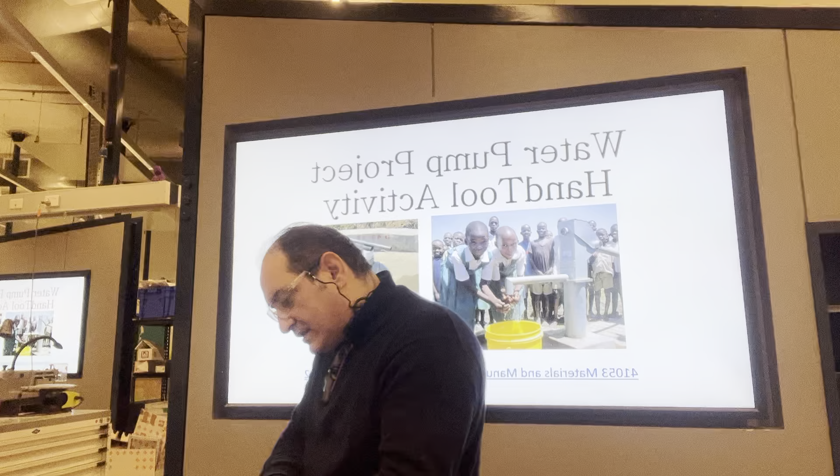Okay, so we're going to start with the other part of the activity. There's going to be the hand tool project. Actually, this is meant to be just the water pump project, a part of the activity we have in the previous subject, where the students work in groups. Now we can work in a group as well. They were designing their own pump, or they can follow the pump we have as a standard one.

The most important thing is that the students should learn how to take a simple stuff like this pipe and make it a pump. Now, what was the definition of the manufacturing processes in general? Set of operations. The main value for it is to make, well, I can say, make the unuseful thing a useful thing, or just add value to the material.

I can buy this pipe, let's say for $5 for 2.5 meters. No, actually it's not $5 anymore. Let's say $12 for this 2.4 meters. Then I can cut it. Cut other stuff like this rod, which costs almost nothing. Some of the rubber valve, make some of the pistons, valve, other stuff. And as simple as that we have a water pump, which is going to be useful for the people who are in need of underground water.

When I say people in need of underground water, it's not only, by the way, in Africa or South America or third world countries. Even developed countries. Actually, even some areas in Australia don't have any access to fresh water unless they dig a well and get the water from there. And not all of them are rich people to buy the fancy pumps.

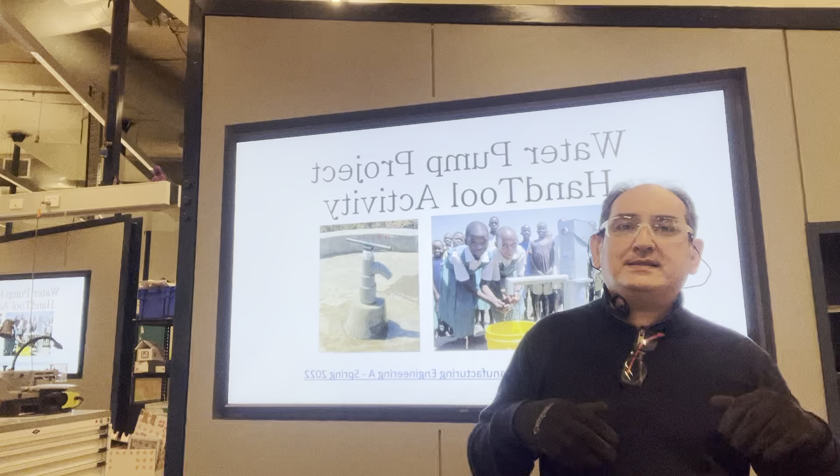Another thing is in the hot areas, they're actually making their own water reservoir under the ground to lower the evaporation rate, and thus they're going to keep the water for a longer time. Once again, they're going to use some hand pumps to get the water out.

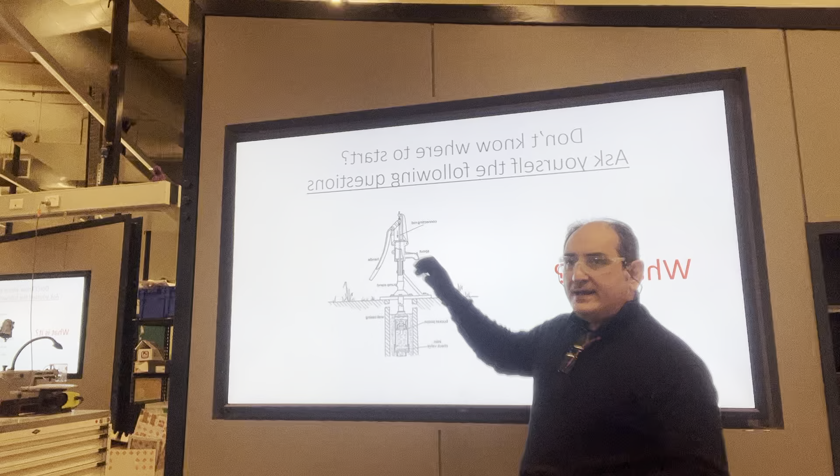So the pump we are going to go through, first we need to know what it is. We call it the two-stroke pump. So we're going to have two valves here, and we're going to have this stroke with the main shaft. When we pull the pump up and push it down, we're going to make negative and positive pressures, and this will cause the water to flow upwards. I think I have a GIF for that.

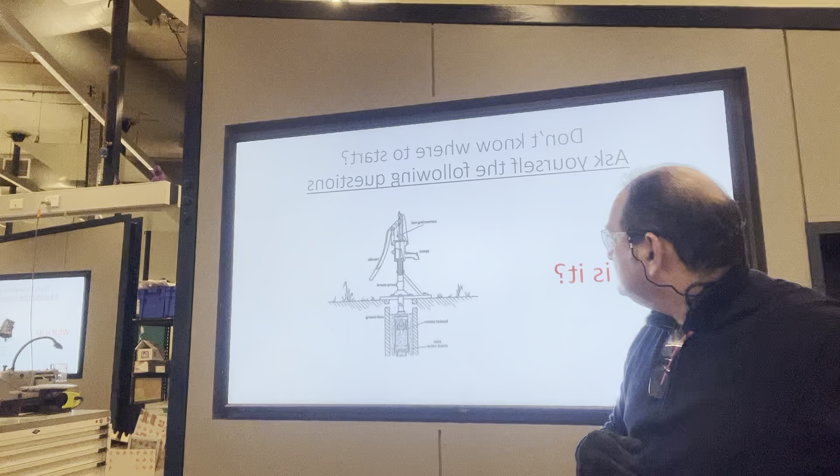Sorry, what is that? Where's the mouse? Oh, went to the other screen? Yeah. Okay, yeah, just make it one.

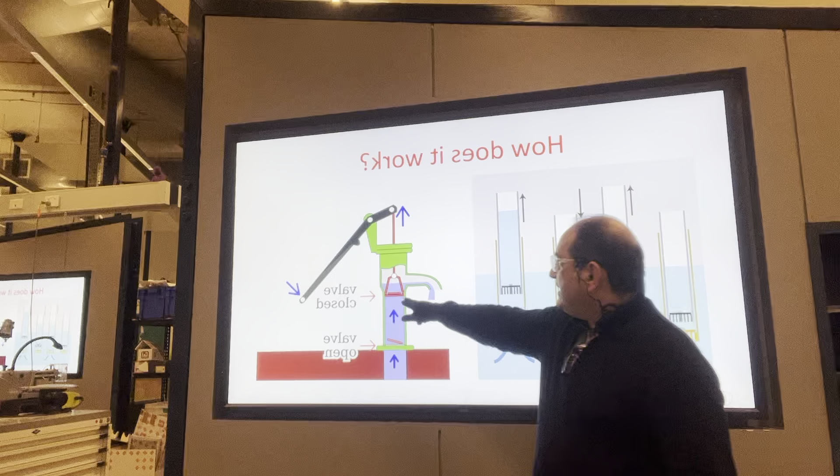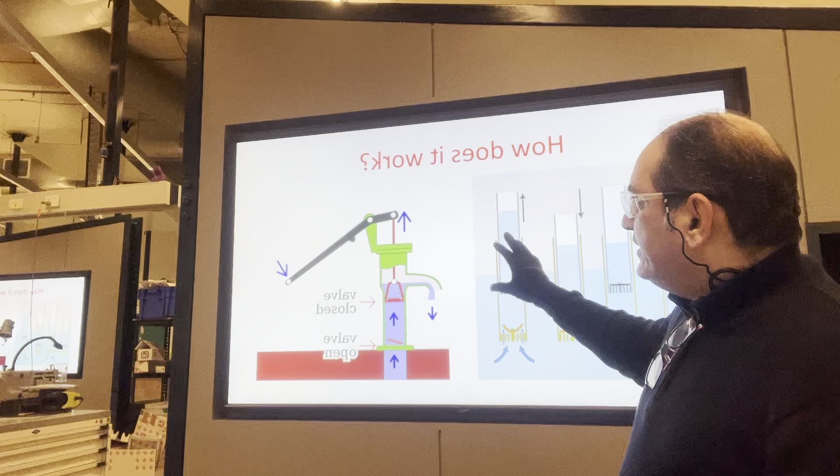Okay, so that's how the pump works. You can see that we have two valves. When you pull it up, the upper valve will be closed and pull the water up. When you push it down, you can see that we are going to have the sequence of opening and closing, causing a negative pressure here, positive pressure here, and the water will raise the level and pump to the outside. So, as simple as that. That's how the pump works. We are not going to worry about this principle now. The most important thing is how to make something work like that.

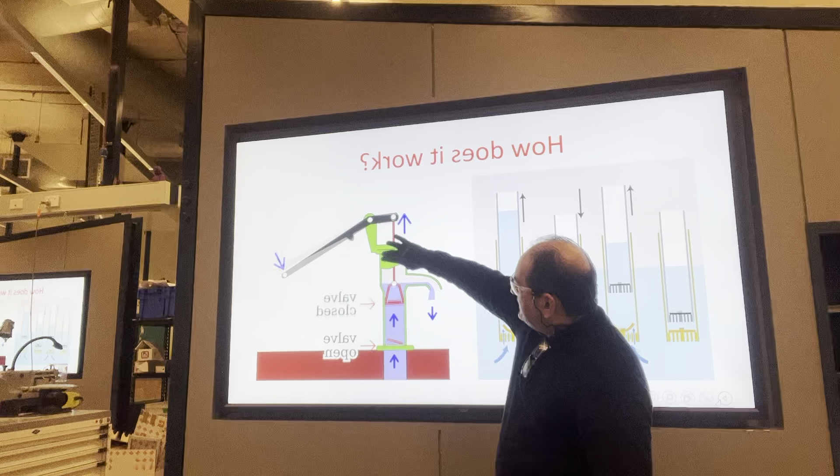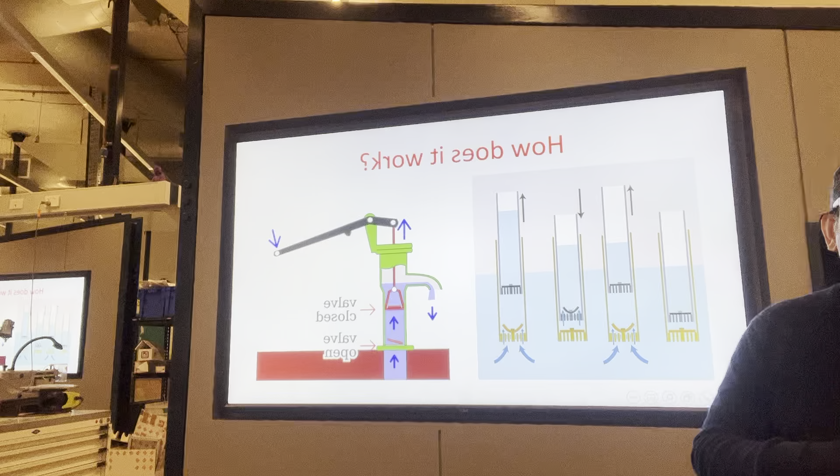So what are the main components? We have the main body, we call it the cylinder. We're going to have the main shaft. We're going to have the main valve, and we're going to have the base valve. That's what we need to make, by getting some off-the-shelf items and adding some manufacturing processes to them, which can vary from a complicated one to an easy one. We're going to go through every part we have in this pump and how we are going to make it using what we call the manufacturing capability.

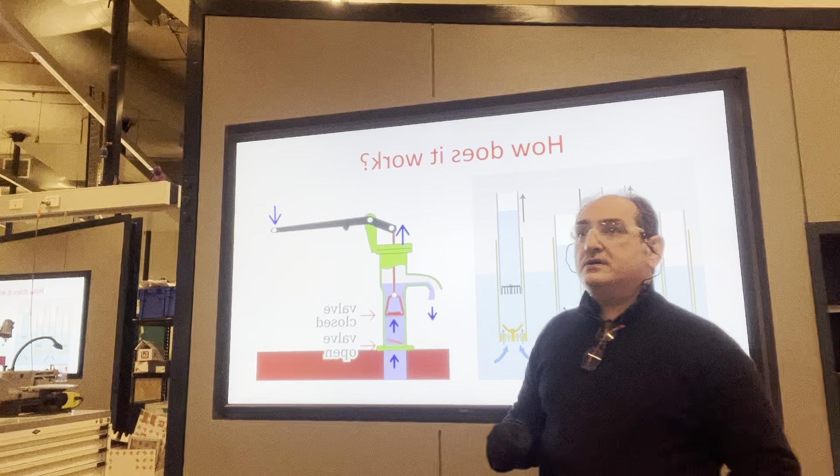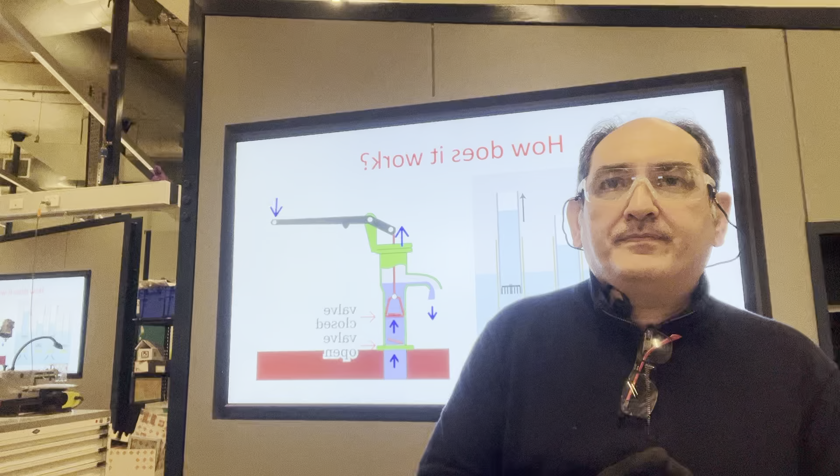I'm not going to tell you we're going to make this body by casting, because most of the pumps are cast iron. I'm not going to tell you we're going to make multiple of these valves, because we can do casting for them again. This is something we need to discuss later as a part of design for manufacturing. But as long as we are making one pump per team, we're going to reduce the manufacturing capability to what we have in this lab.

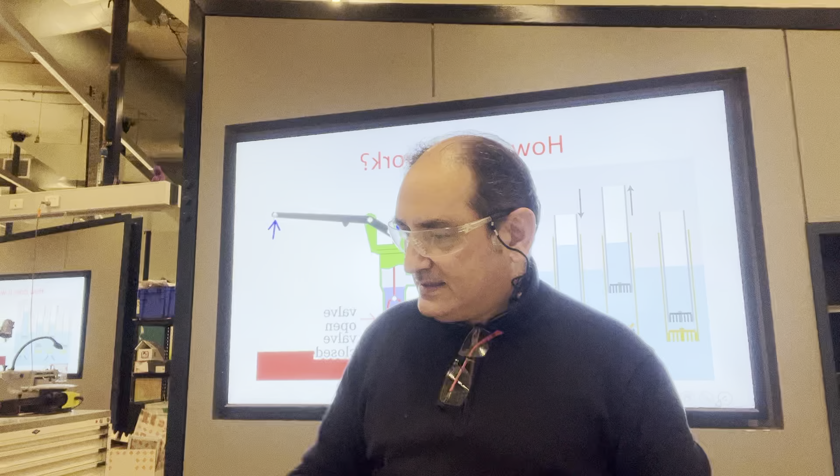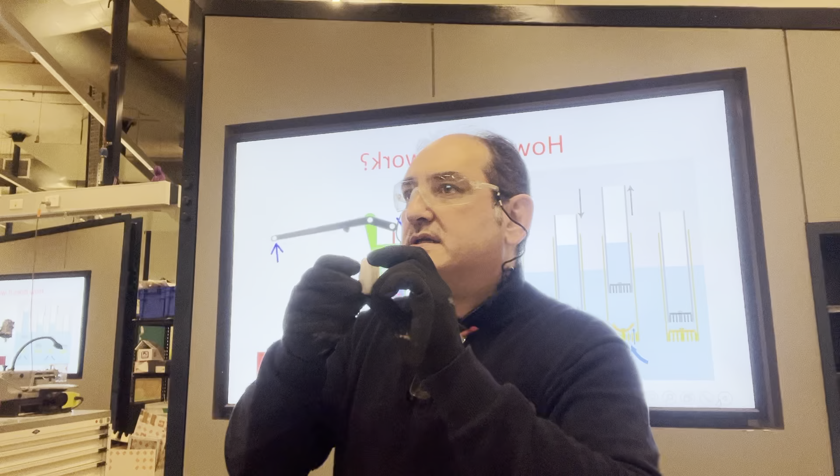So what we have in this lab is the drill press, the saw, the manual saw, the rod cutter, the scissors, and we have the dies for the threading, and we have the tapping head. So that's what I'm going to use to make this pump. Even for the part of the valve, back in the old days, I used to machine the head for the students. I'd let them use the turning machine to machine the head from nylon.

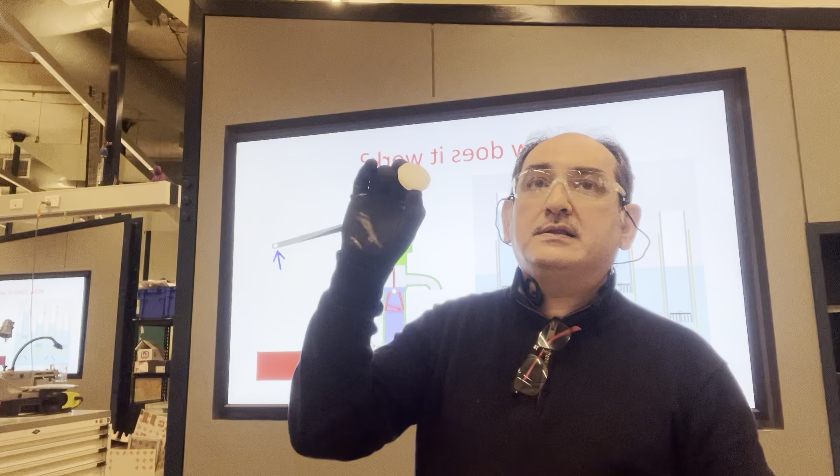We had too many problems with that. The students started to do trial and error on this machine. The main problem we have with the nylon during the machining is what happens to the nylon during the machining. Would it melt? Exactly, it's going to heat up, so it's going to expand in size, and when you try to put it in the part, you will find, oh, it's small. What happened? I got it to the dimension, but it shrank down.

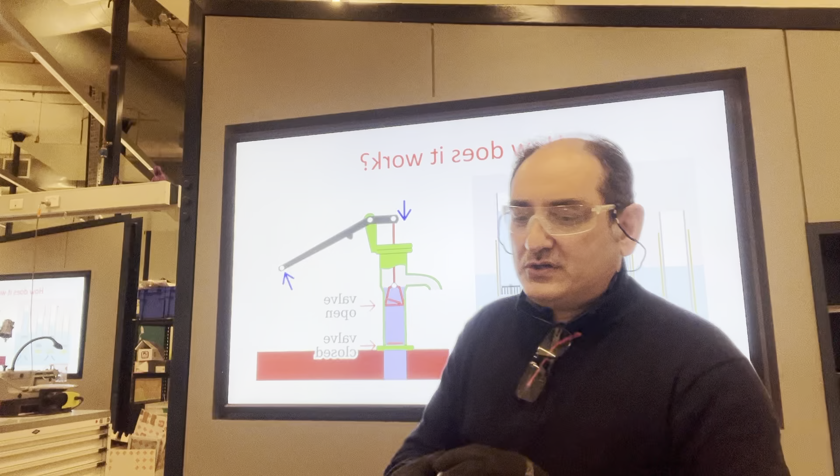So we are going to try to apply something else this semester by making a mass production of all these valves. By the way, one of them is going to be stepped, the other one is going to be just one level. Can you give me some suggestions on how to make these valves? If not machining, can we have another option to do that?

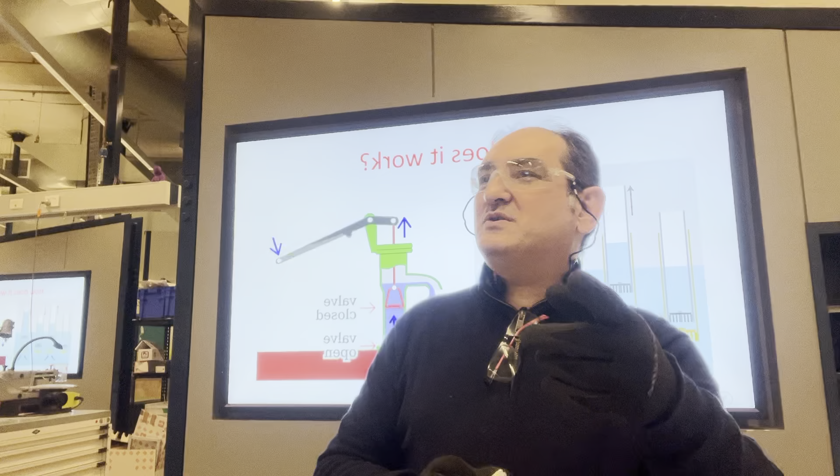Shout, shout, so they can hear you on the phone. I'm recording, yeah. Yep.

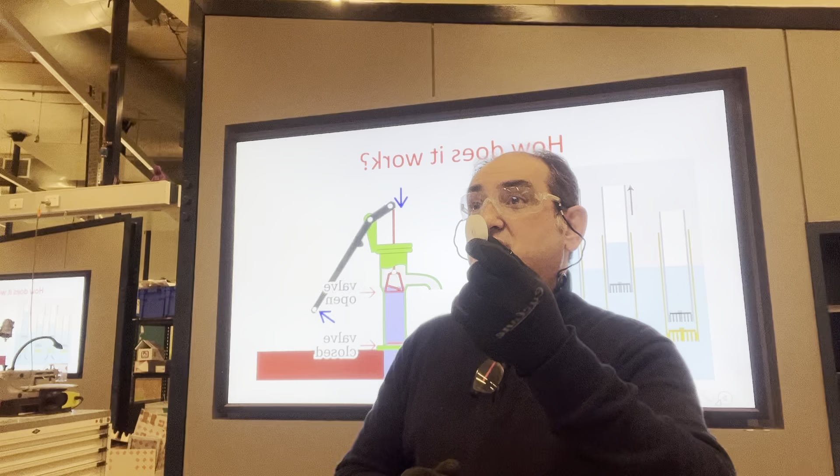You will say 3D printing. That's a good option. What's the problem with 3D printing? They're not strong enough, unless we're going to make it in metal. Can I give you another option? Okay, if I can 3D print it, I can use it as a pattern for casting, but I don't have the foundry to melt and solidify. So I can take the pattern, made with 3D printing, and do the process called thermoforming.

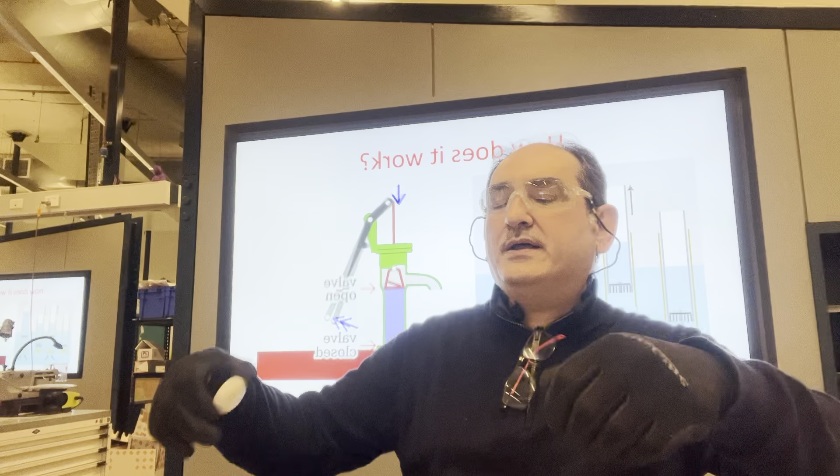Have you ever heard about thermoforming? When you buy something new, like food trays, they're made by thermoforming. Okay, I'm going to show you the machine upstairs later on and how this works. So we have the plastic sheet. We heat it up and put it over the part with the negative pressure down. It's going to take the shape of the part. Then I can melt some resin and fill all these cavities. You're going to have multiple of these parts.

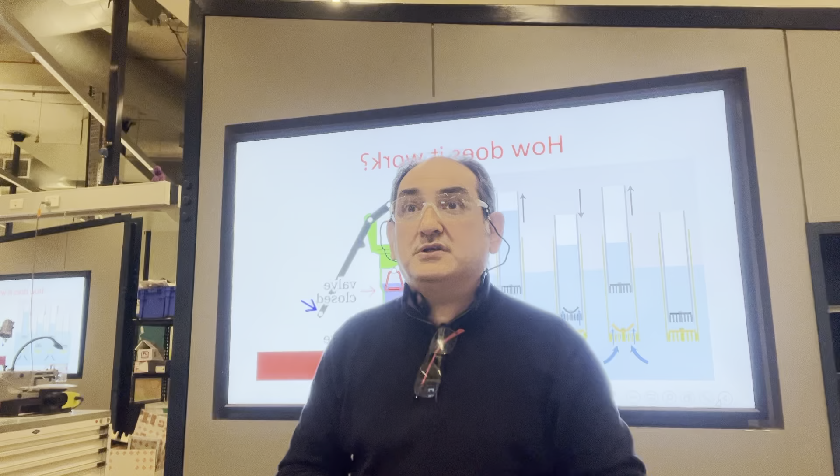Okay, so try to expand. I always write that down in my module. Try to expand your knowledge. It doesn't have to be reading something. Maybe watching some simple videos and then try to add your logical sense to it.

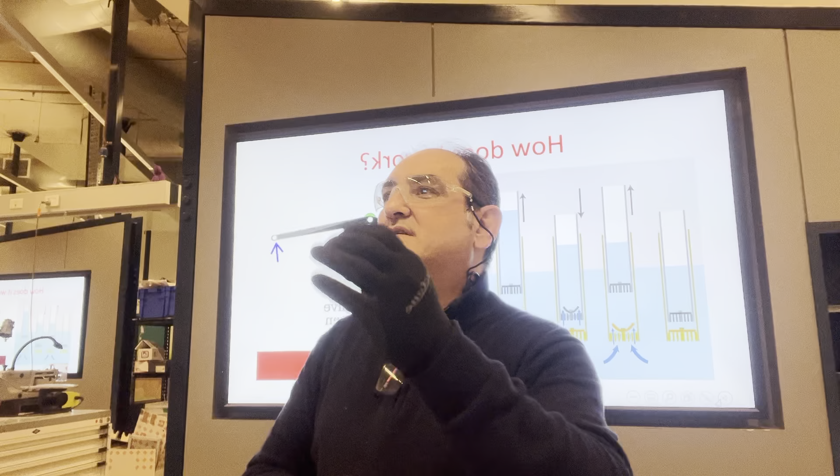Okay, now, the 3D printed part is not strong enough, but I can use it as a pattern. The manufacturing time for the pattern is going to take 2 days. Well, no. Making the CAD, 5 hours, get the part, do the thermoforming, then the casting process is going to be for 100 or 1,000 parts at the same time, and the curing time is going to be 24 hours. But I'm going to get 1,000 pieces in 24 hours, even with the holes within. Okay, so that's another method to do that.

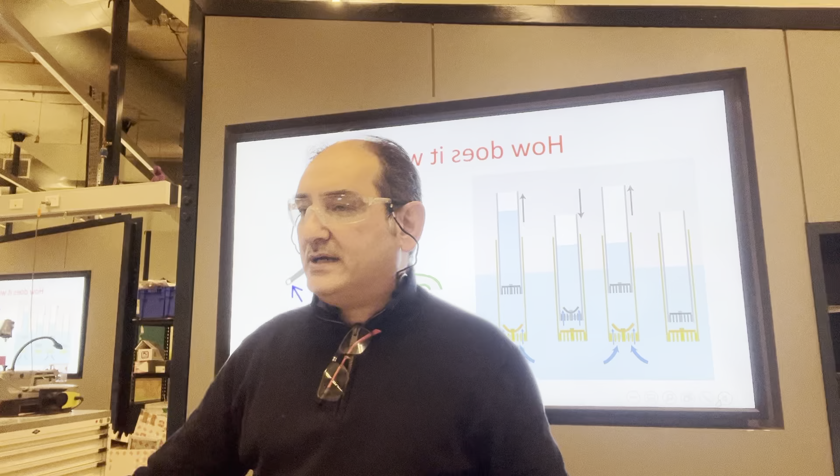Some of the washers, I can simply cut them. We have the roll of rubber, and we can make the circle and cut it with scissors. This rod can be cut by the saw, but for more accuracy, you can cut it with the rod cutter. How to cut the pipe? We have the pipe cutters, and we can cut on the saw machine.

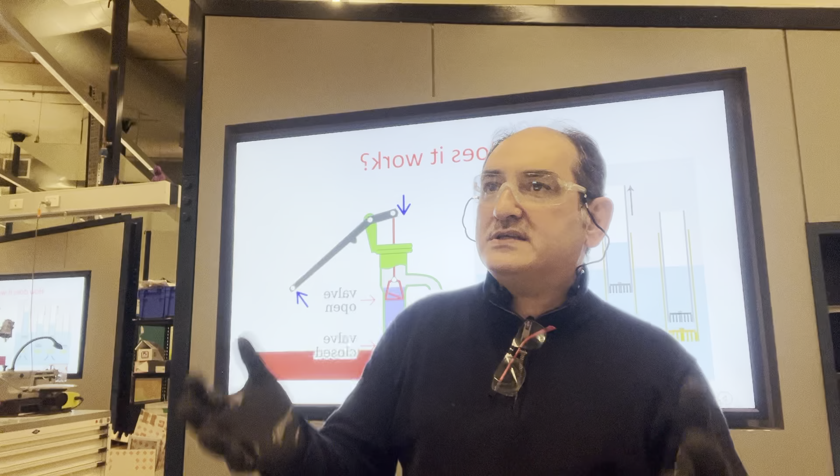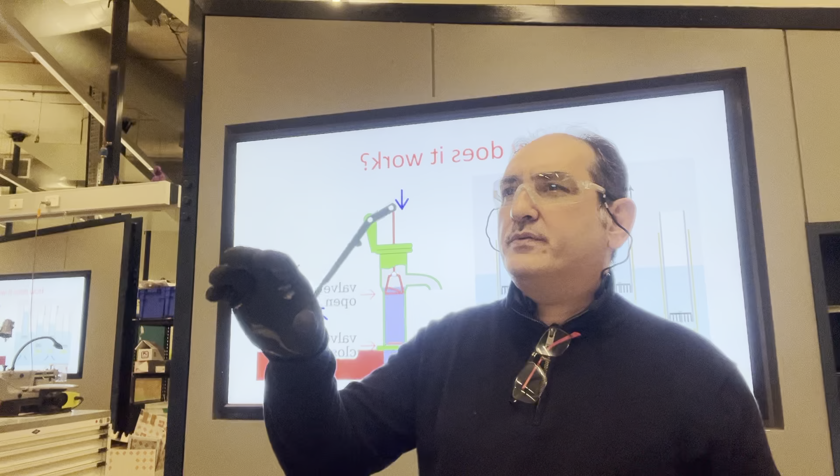So the first thing we are going to do is, first you go to Canvas, and you will find the instructions for this activity. Second, you need to work in a group of 3 students, because as I told you, we pre-cut most of the parts. You only need to do the minimum amount of work to finalize them and assemble the pump. Maybe you are going to have the chance to test it on the test rig there in the back.

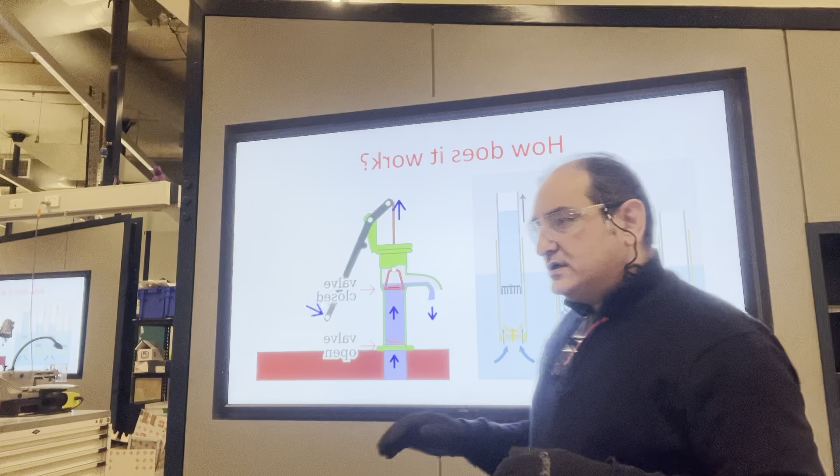I said once again that most of the parts have been pre-cut, but we can cut them again to give you the hands-on experience, and that's what I'm going to teach you today, how to use the different machines. I sent the videos earlier, but still, to have the hands-on experience ourselves. Just for example, I'm going to alter the length of this one, so you will learn how to do it. Or maybe we can get extra material and start to cut it to size. So let's take a look at what parts we have here.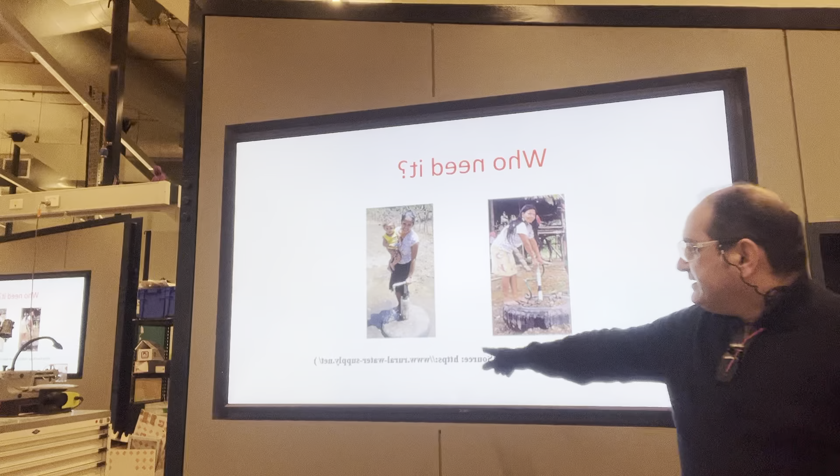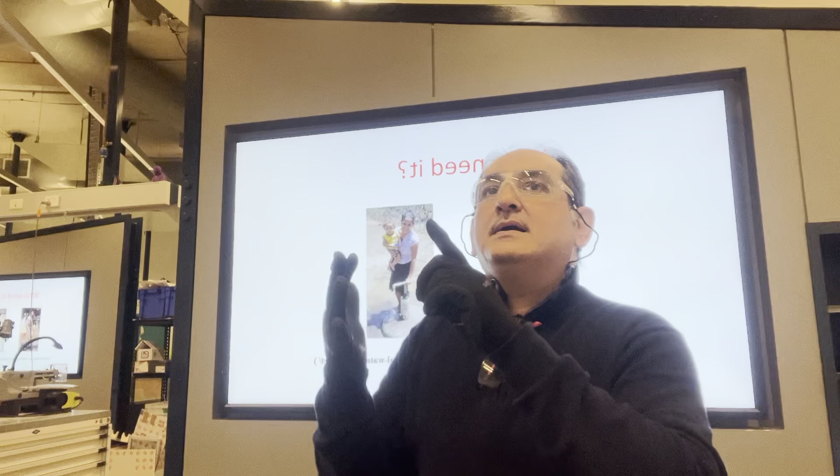Okay, so by the way, if you check this website, you will see that there's an international competition for the design of these pumps. Last semester, the students worked in groups of 5. It was all online, but they did a full study about what would be the best design. Each group needed to submit 3 different designs, and then they selected one based on the best properties, the best manufacturing processes, the best cost, and the recyclability of the pump.

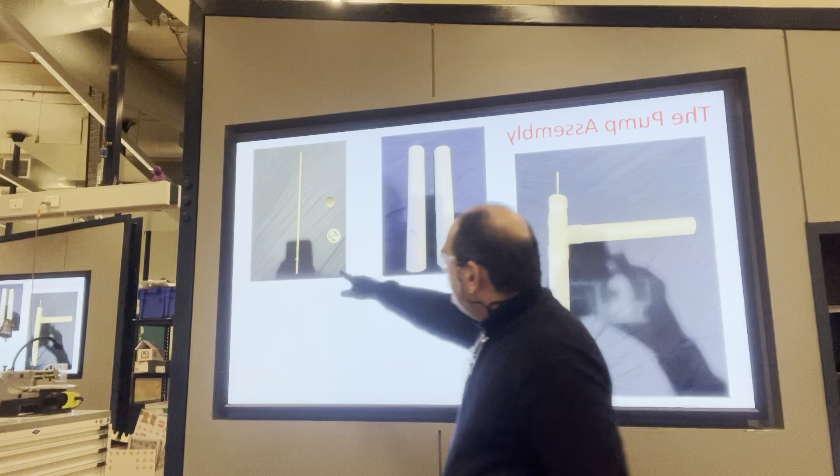So this is the pump. I have it now disassembled in front of me. This is the pump, and it consists of the following parts. We have the main cylinder, the main shaft, the main piston, the washer, the base valve.

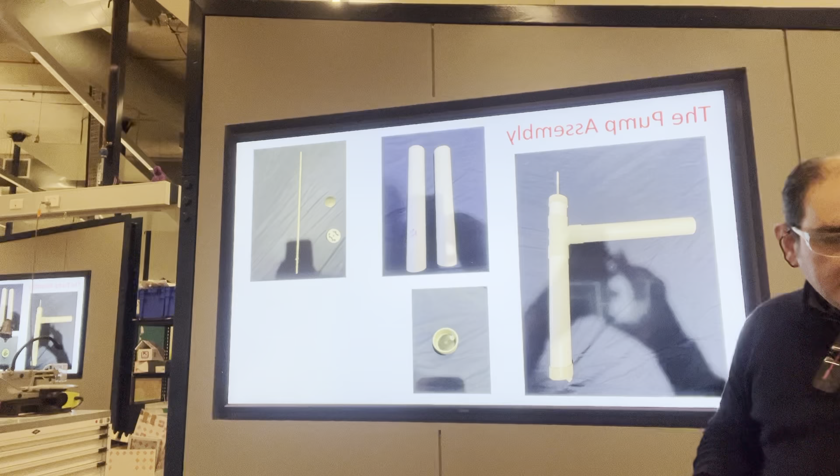Well, that will be the top pipe. It's going to be sitting at the top after the T-junction.

By the way, this is not my photo. I just stole it today from a previous report. So sorry for the quality, but actually I think it's acceptable.

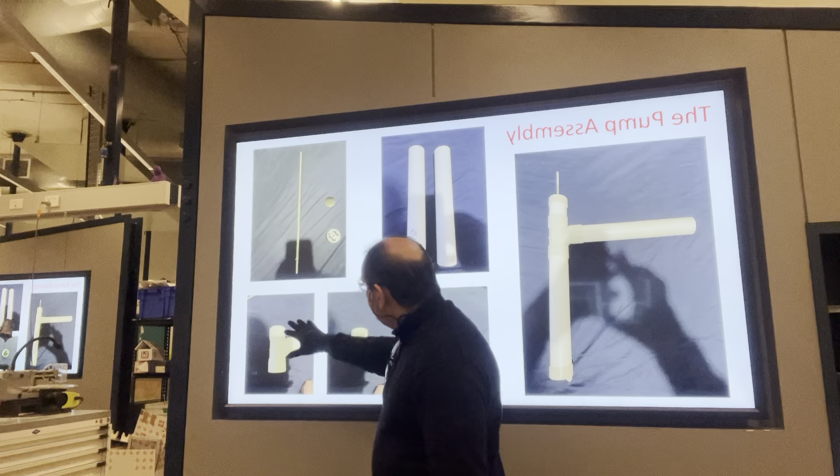So as you can see, each part can be manufactured by a different process. This will be an off-the-shelf item. I don't need to make it. I can use it as it is. What do we call that? If I get the part off the shelf and use it directly, it's called standardization. I get to minimize the time of the machining because I get to minimize the cost in that case. So don't make something fancy if you can simply use it.

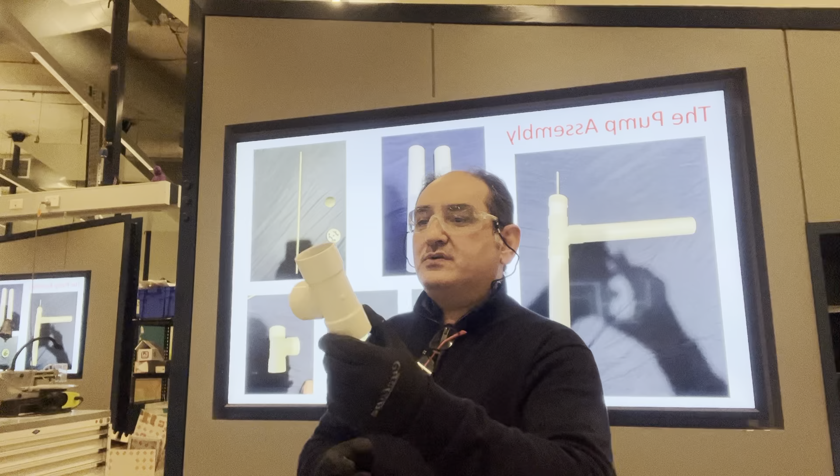But the most important thing is you have to know how to use it. If I put it that way, this will be wrong. I have to put it that way to be correct because the direction of the flow is going to be correct. So in this slide, you are going to see first the engineering drawings.

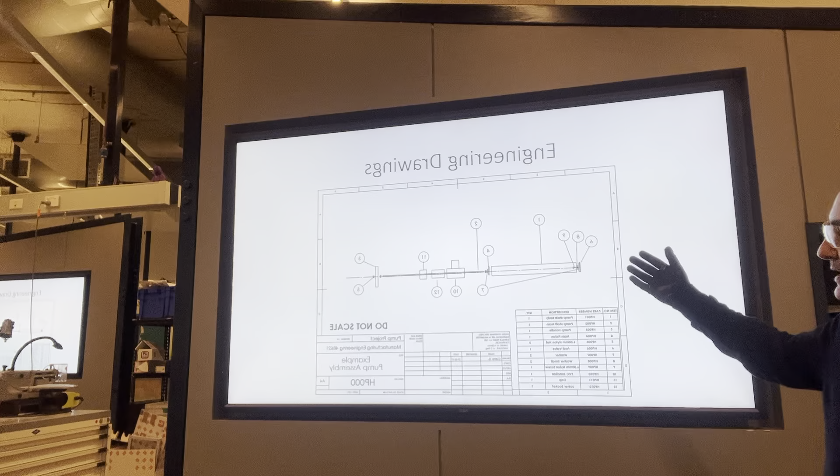Now for you, what will be the first thing you are going to do? Well, I know this will be available for you. You can check that on Canvas. But as an engineer, you're sitting as a group and you decide to do something. You make a hand sketch. That's my pump, that's how it's going to work. If you want to actually make different types of the valve, this will be your option.

We still have 3 sessions for this. Yeah, we have 3 sessions for that. So you can have the time to design your own valve. But in all the cases, we're always going to have the standard one, and I will show you how we are going to make it in a massive production rate.

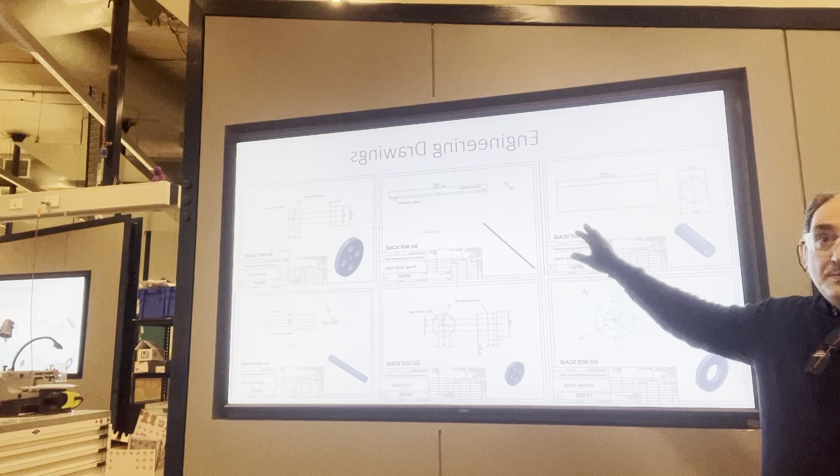So we start with the engineering drawings for every component individually. So we have the main cylinder. You can see that we have a length. This is just an example. You have different lengths for the pipes. You can cut your own length, doesn't matter. The main rod, the main piston, we have the pump handle where you're going to push and pull the main rod, and we have the foot valve, and we have the washers.

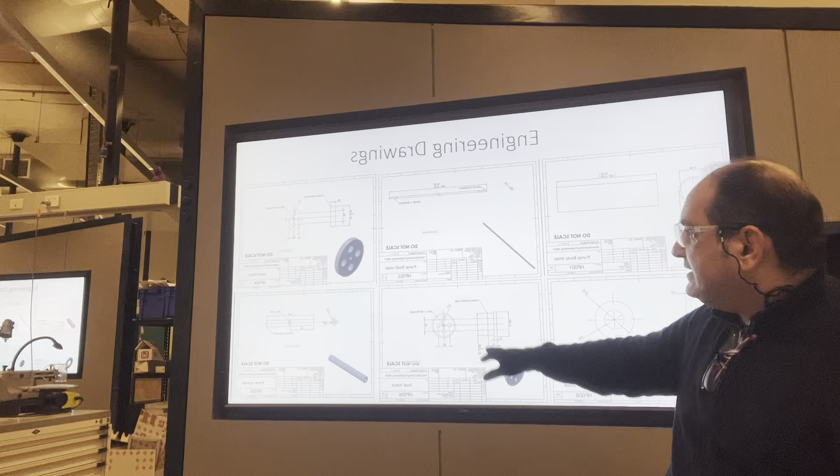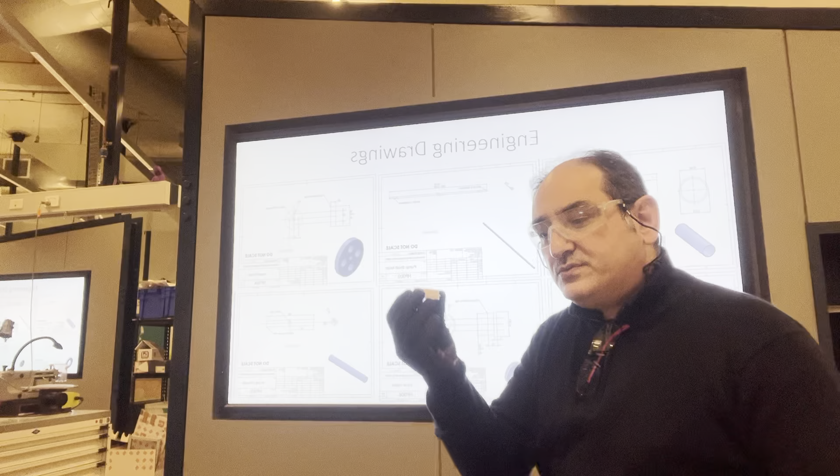The quantity actually should be mentioned here. The tolerances also should be mentioned here because we're going to have some mating parts while we make the valve work, especially for the foot valve, because this will be fixed in the pipe itself. So the tolerance should be actually plus, not minus, a few fractions of a millimeter. So it's going to be fixed when I'm going to do the pumping. Otherwise, in my first push of the piston, this part will be taken off.

So I came to the introduction of the tolerance. Well, this one is a press fit, but it's not going to hold the pressure. So of course I need to add something like bonding material, adhesive, to fix it in. Okay, what else do we have?

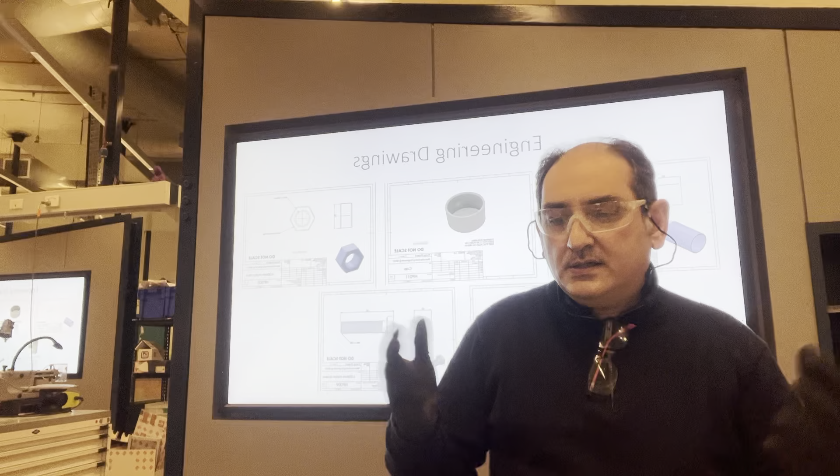This is not all the parts. We're supposed to have more parts. This is the joint socket. This will be on the side. This is an off-the-shelf item, off-the-shelf item, off-the-shelf item, and off-the-shelf item. You only need to drill it in the middle to pass the shaft through. So every part is going to have different manufacturing processes.

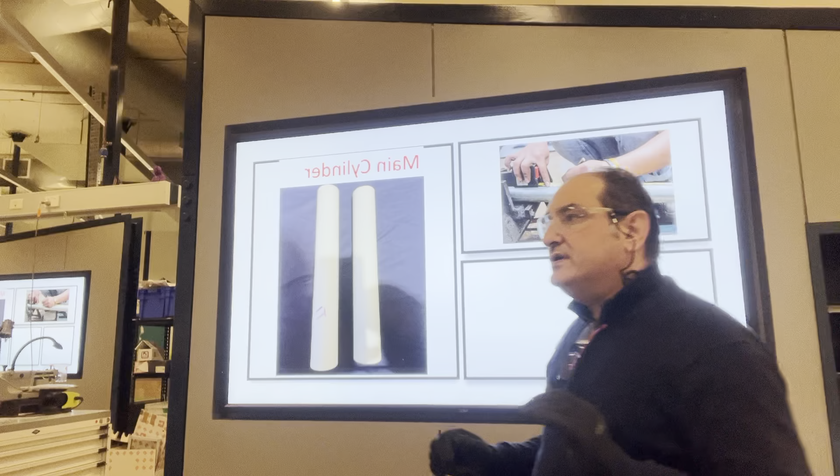We go to the main cylinder. I'm going to have the 2.4 or 3.5 meter length of the PVC pipes. You can check the dimension because this will be very important to make the other components like the bottom valve and the main piston. So what we need to do first is, when you do cutting, the most important thing is to do the measurement before the cutting.

Well, actually, the simple rule of cutting is you measure twice, cut once. Because you don't want to measure a distance and then cut it and say, oh, well, I cut less than what it's supposed to be or more than what it's supposed to be. That means you're going to spend more time on doing the cutting. Usually the measurement takes less time to perform. Then we can cut on the saw machine we have here.

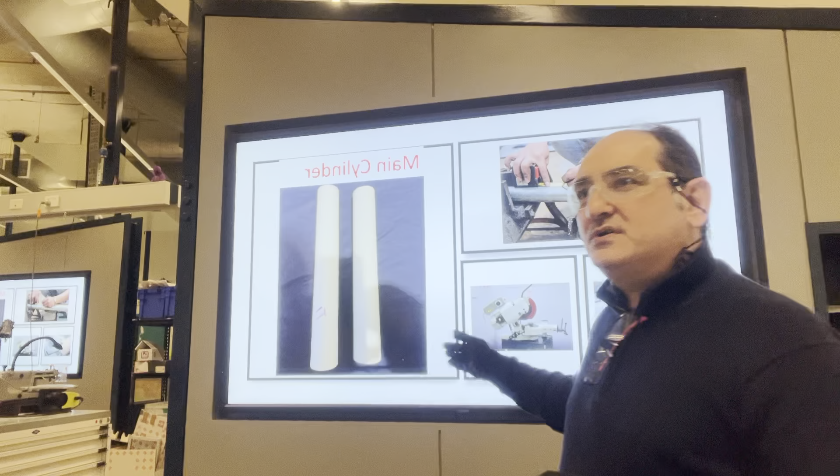Once again, I took these photos from his report, so I didn't take the photo of our machine. What time did we talk to each other? 12? Yeah. And I told you I'm going to make the presentation. I made it in 30 minutes.

Or we can simply just use the saw to cut it. Which operation is going to be better? What do you think? Which one is going to be better?

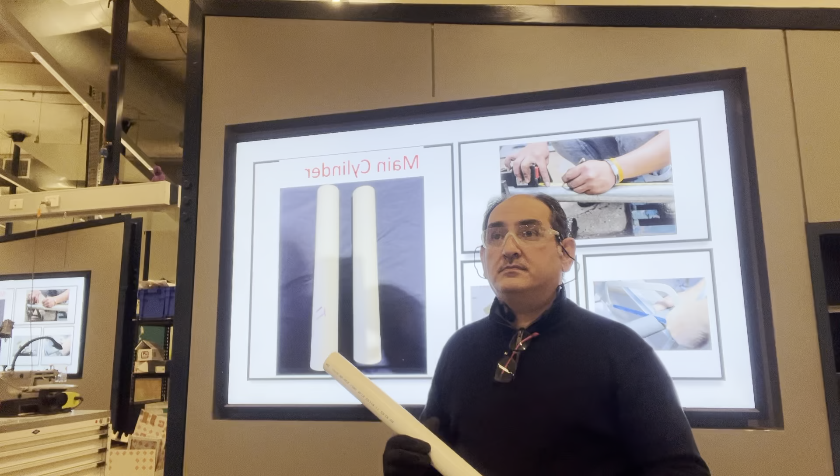This is the hacksaw. This one or the hacksaw? So using the machine or the hacksaw, what do you reckon is going to be better? Machine. Why? It's a lot easier to use. Okay, you will say easier to use, but I'm going to show you something that actually proves the opposite if you are not expert with it. So it will depend on your experience.

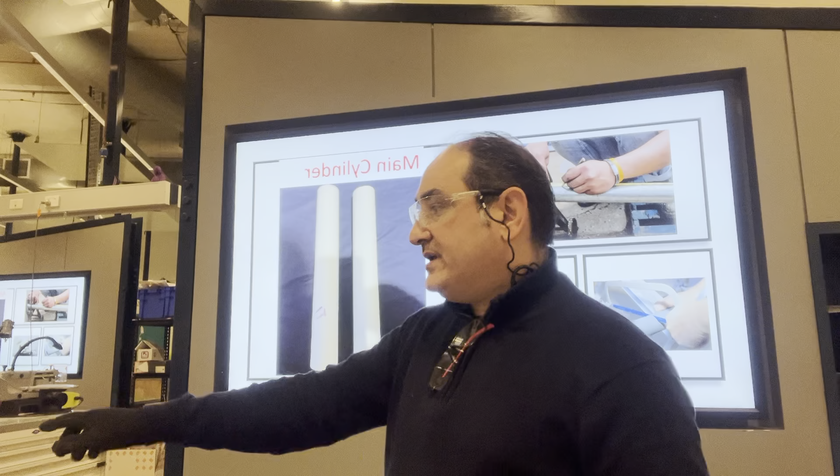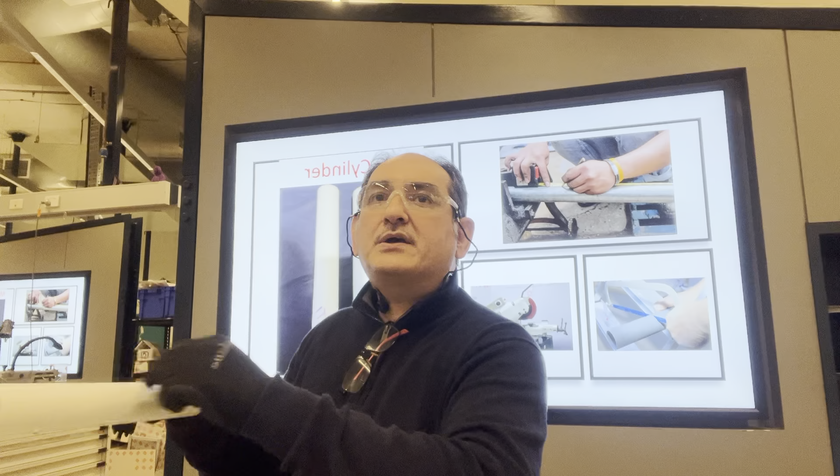I can damage the part by using the hacksaw, and I can damage the part using the circular saw. So it depends on how I'm going to hold the part, and you will see that when I'm going to use the vise there. The same thing if you're going to use the vise here and you add a lot of pressure when you press the pipe on the side, the shape will be elliptical, and we're going to have too much stress. While you do the cutting, you're going to have a crack happening. Same thing will be happening there.

So we have two options to do the manufacturing for this part. We can also have the main rod. Actually, I should remove this one. So the main rod can be simply cut from this 6mm diameter rod. Once again, you need to measure to have it to the dimensions. We can use the rod cutters to cut that. I have the small one. I couldn't find the large one. I don't know why, but anyway, we always can find it.

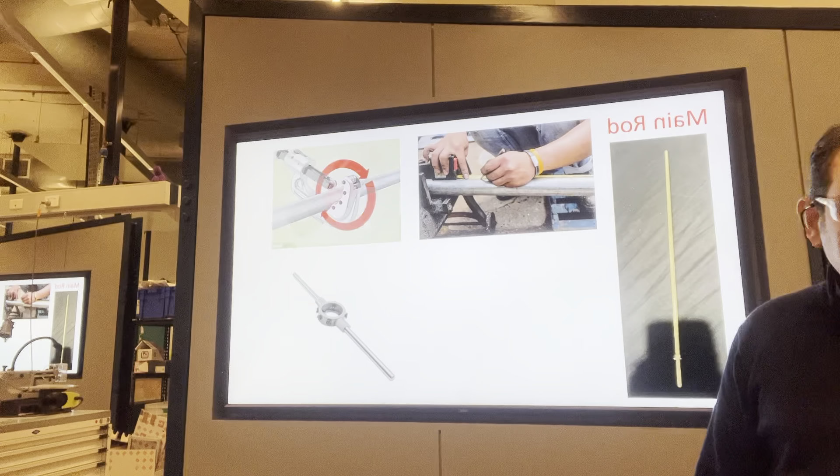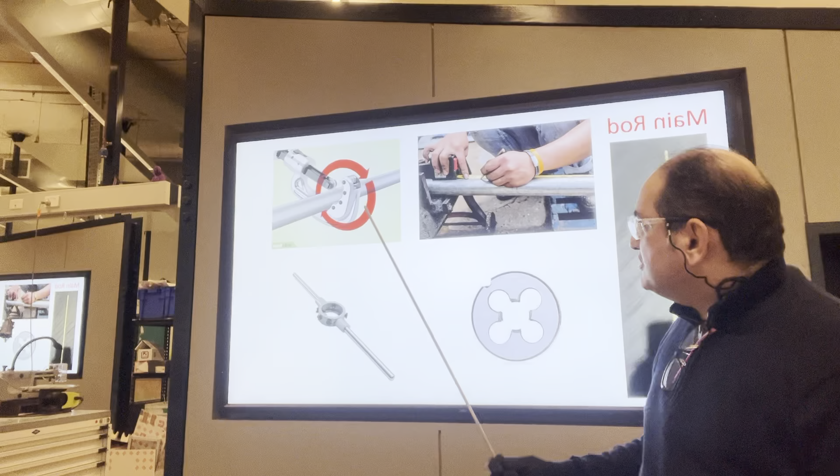You can see that this one is going to require a thread on both ends. So we can use the threading die to do this operation. These tools are available in the second drawer here.

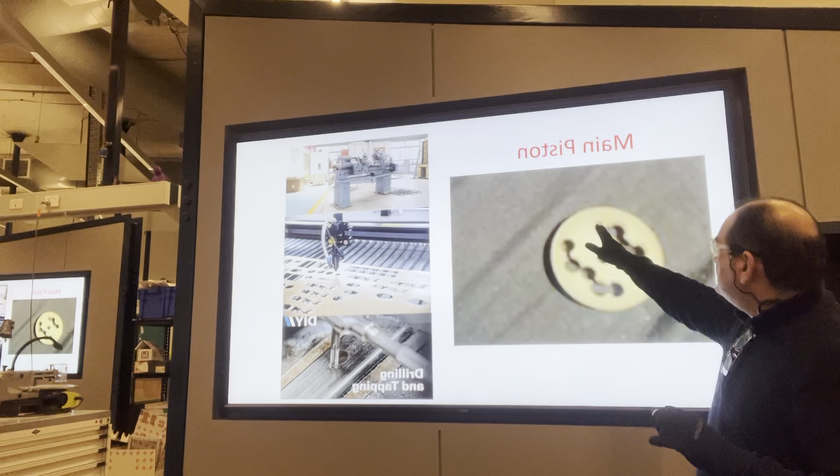Anyway, this one, that's the valve. That's meant to be something. I did that, he did this. I cannot say this is wrong, but his idea was having something like a crescent here, because this will increase the flow of the water when you push the piston down. It didn't work fine, but anyway, we can simply cut it on the turning machine.

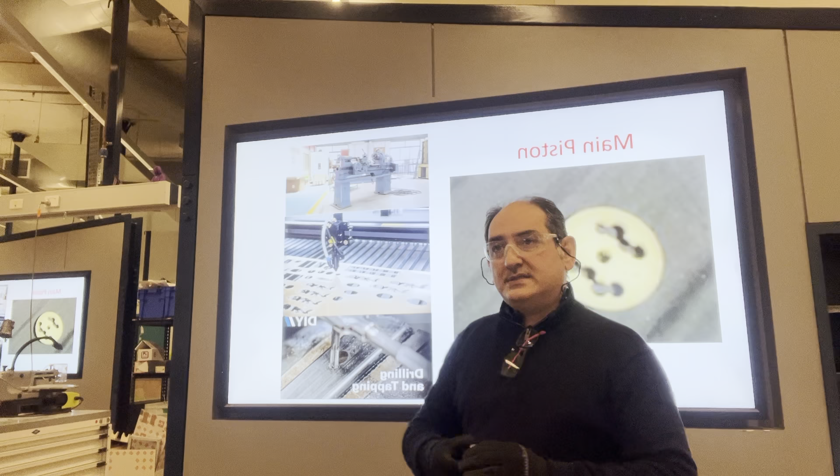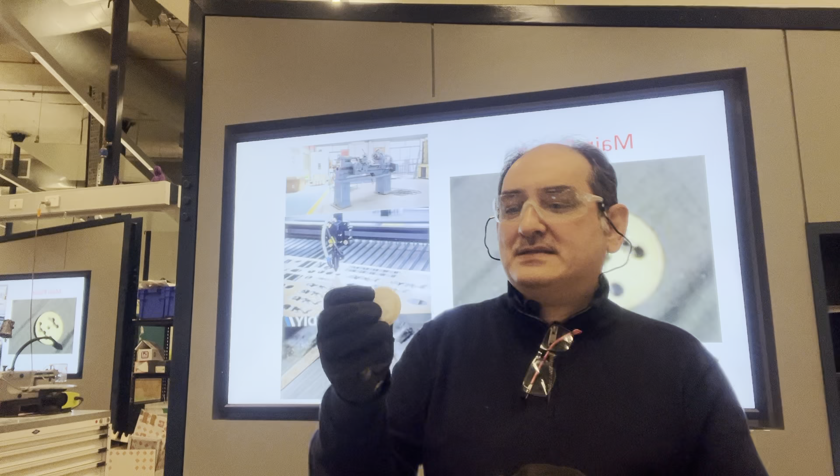We can 3D print the part, but I came up with another way to do it, which is simply laser cut. What will be the problem with the laser cut for the foot valve? It has two different levels, right? So how do you think we can overcome this problem? Separate pieces. Exactly, separate pieces, and then we can simply drill the hole in the middle by the laser, so it's going to be accurate.

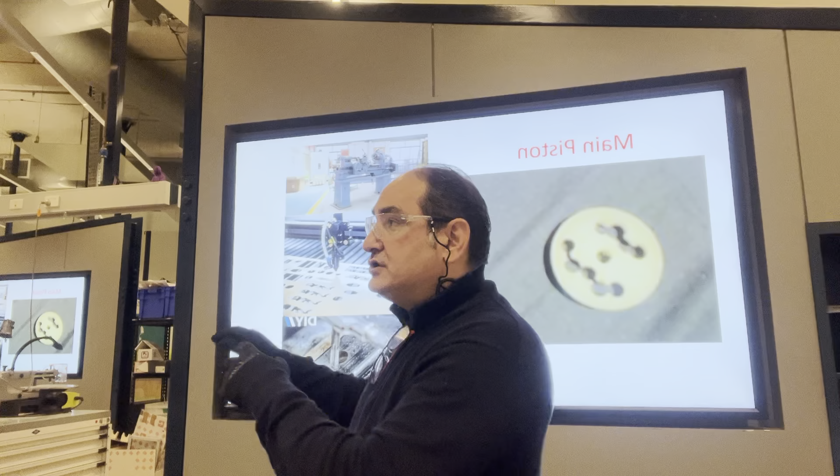So if I'm going to use the bolts and nuts to fix the two parts together, I have to be sure by adding some glue in the middle, so they're going to solidify and become one part. Do you think that cutting that here in 2 minutes, doing the gluing and leaving them to solidify for 24 hours as one part with very high dimensional accuracy is better, or the 3D printing is going to be better? Remember that when I cut it here, I can have all the holes cut in accurate dimension. It's a clean manufacturing.

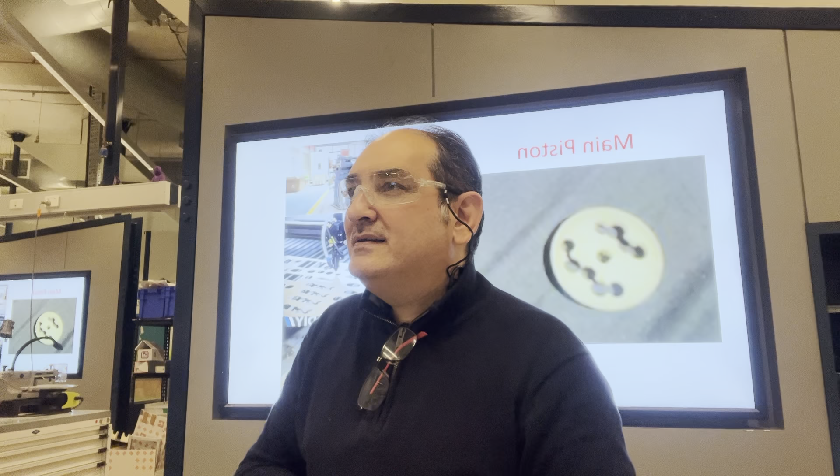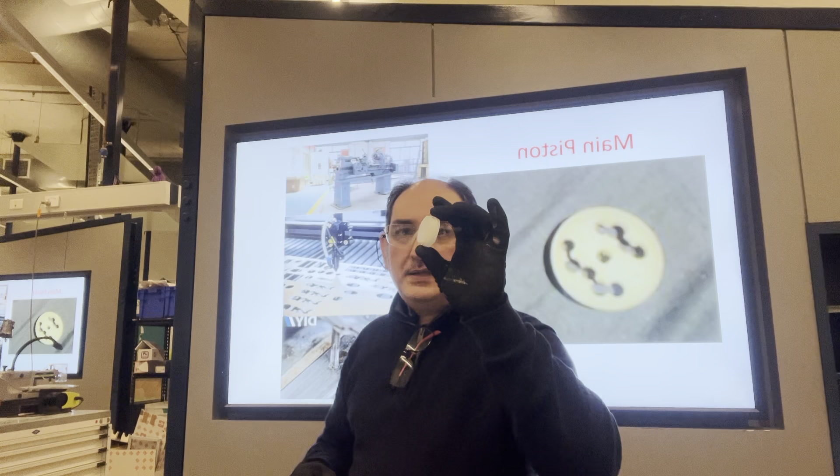Okay, so once again, think about that. It's up to you to go to the Pro Space and print your own parts if you want. And also I can allow you to use the small lathe machine to manufacture such parts if you want, because we do have the nylon material available.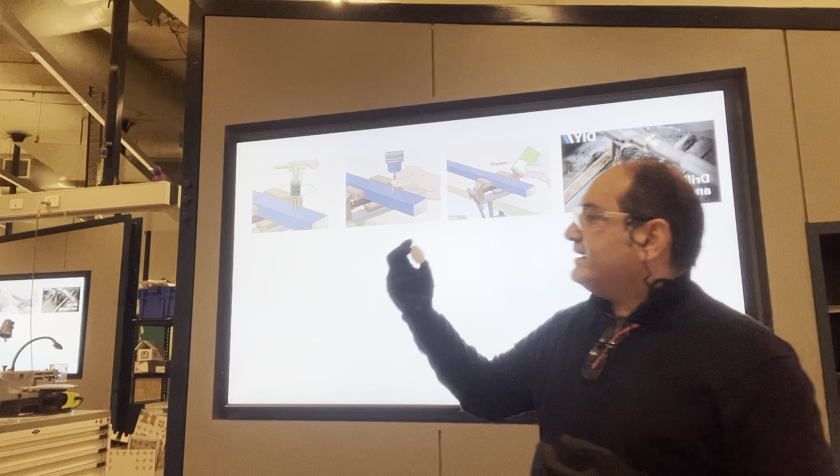We may need some drilling and tapping. For example, this part is threaded inside. So we need to do some internal thread by using the tapping head. The process is very simple. Just add some lubricant, do the drilling, then do the tapping, and you get the internal thread. We can do the drilling either using the drill press for more accuracy, or you can simply use the hand tool. But usually I see students try to use that in the vise and they always keep going in all directions.

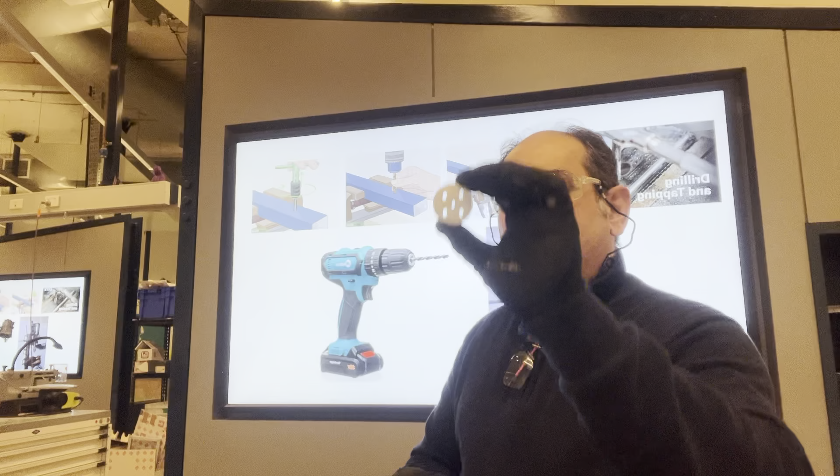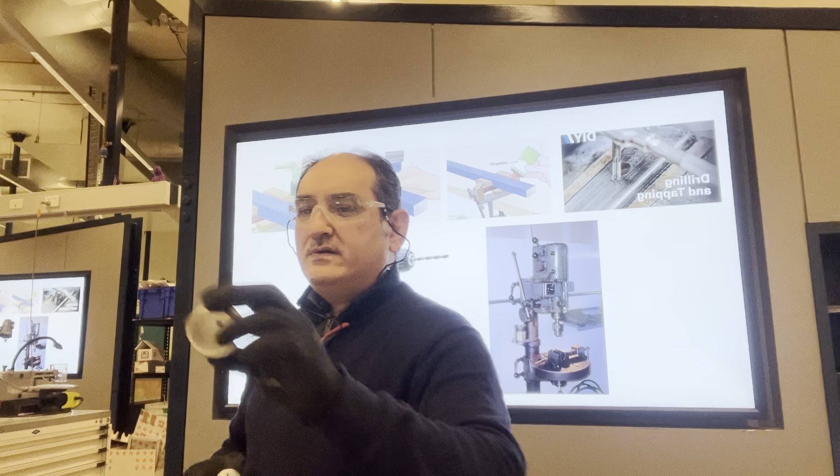However, if I do this part by laser cutting, maybe I don't need any drilling operation after that. The only drilling we are going to have is going to be on the drill press for this hole and for that hole. But the problem is, as I told you, I made these parts ready for you. So what we are going to do is get any material around and just try to apply the process of drilling on the drill press as an activity of using the hand tools. Of course, this will be more accurate than that.

How to make the washer? We can either cut it with the cutter or using the scissors. Both are going to do the job. Just let me check if we still have stock material.

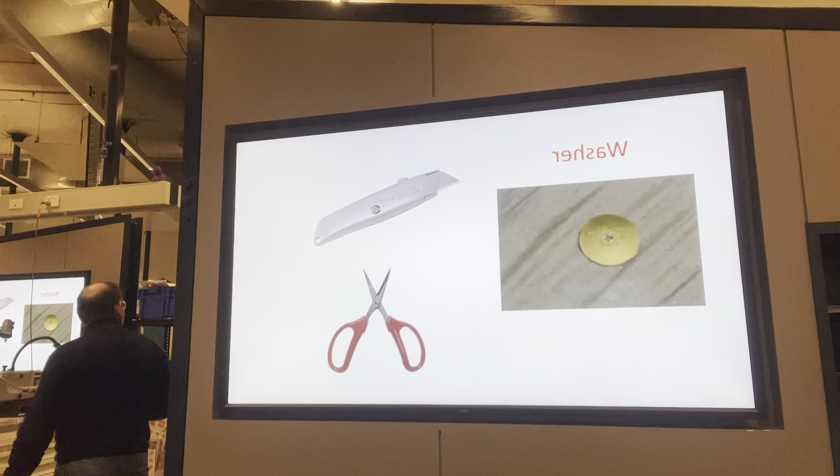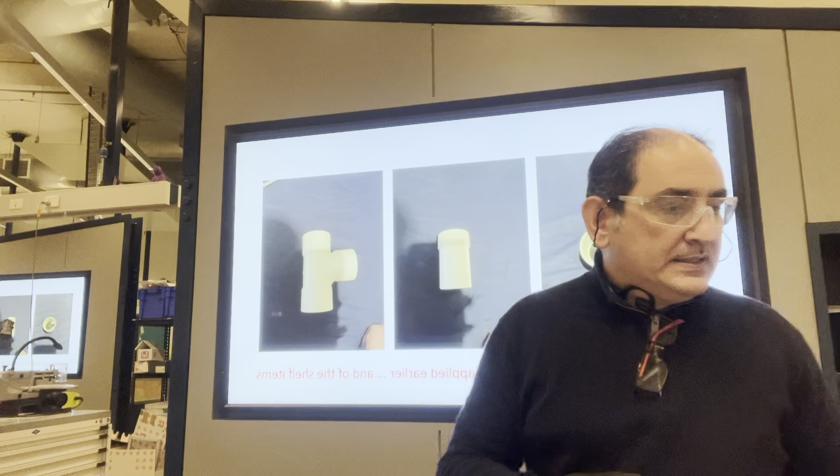I need to be sure that it's going to be available for you before we start this session. And finally, we have the foot valve, and the other components can be either off-the-shelf items, or we can simply use the same processes to manufacture them. So I think that's ending this slide. So by now, you can see that simple processing will make a product.

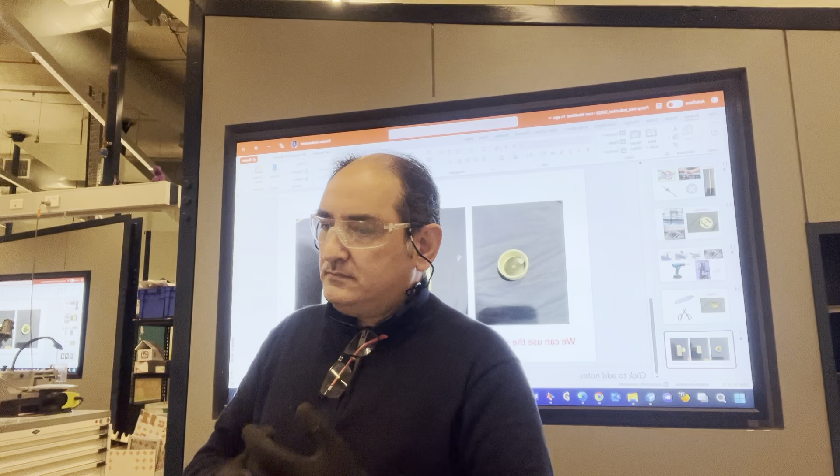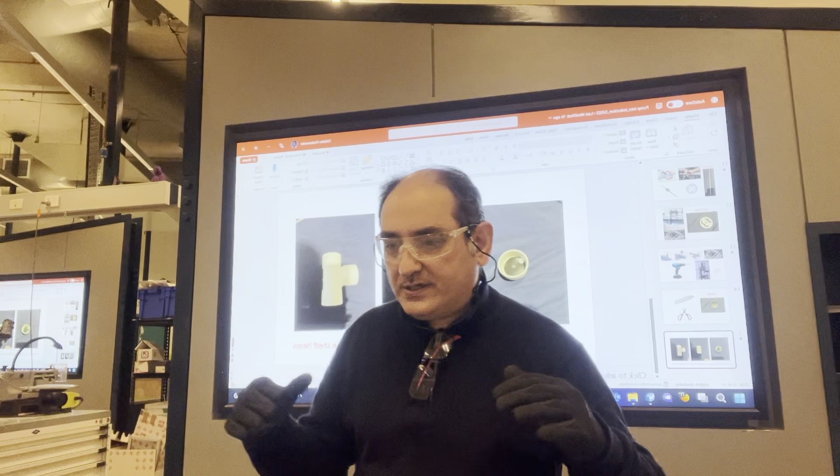Okay. So what we are going to do is we are going to apply all the basics of the manufacturing skills we just watched in this video, and we are going to use the machines we have. We don't want to go outside and use an external machine, because this is, as I told you, about the manufacturing capability. Use what you have. If you would like to make something like a shaft and it's going to have two sides, you can do it on your milling machine, lathe machine, easy.

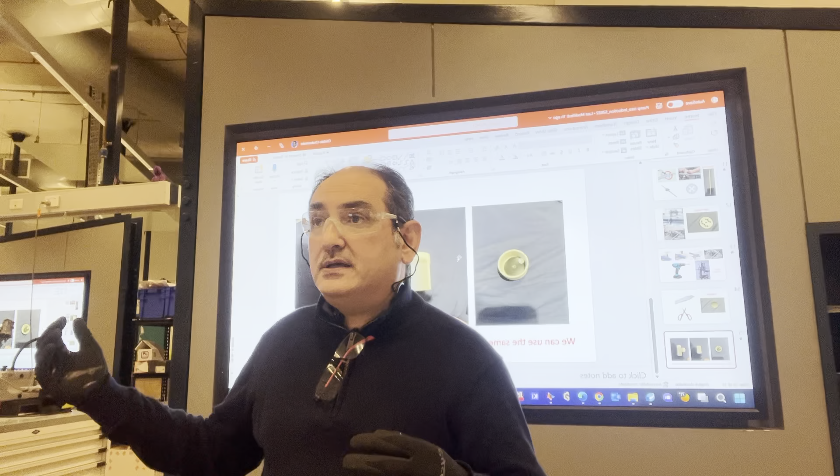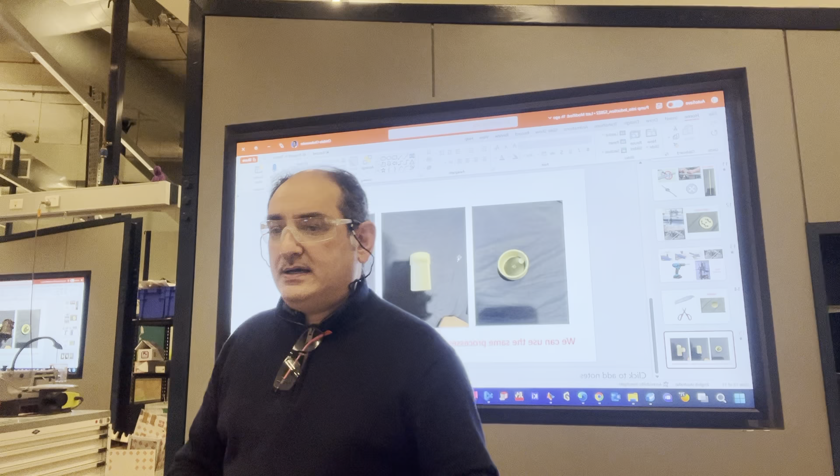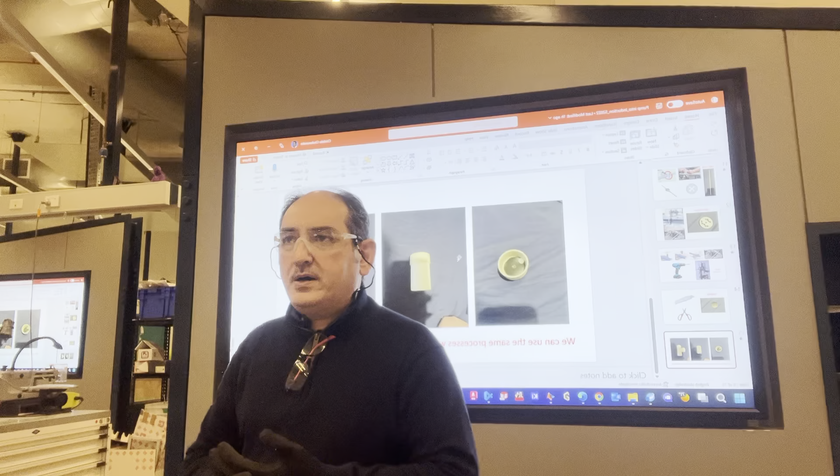We have all the tools. We are going to learn how to do the cutting today. The cutting for the pipes, the cutting for the rods, and the next session, as long as we have 3 of them, we're going to learn about the tapping and threading, and also the drilling at the same time. And the last session we're going to assemble the parts and try to make a pump working, at least by hand. We're only going to put it in the tank there. We try to pump some water just to prove that we actually got the concept of making the pumps.

Now for the main piston, by the way, it should have very high accuracy because it's going to slide inside, and this should keep the pressure with the walls. For this one, it does have a groove on the side, so we can put the O-ring, so it's going to close all the dimension.

With the laser cutter, the main problem we have is the accuracy is good, but the problem we have with the laser cutter, yes? Oh, I thought that you had an answer. I didn't have an answer. What, edges and like the timing? Sorry? Edges and the timing? But actually, it's the thing you cannot see by direct look. The cutting we have on the laser cutters will never be a straight line, a wall. It's always going to be inclined to the inside. So one side is going to be larger than the other one.

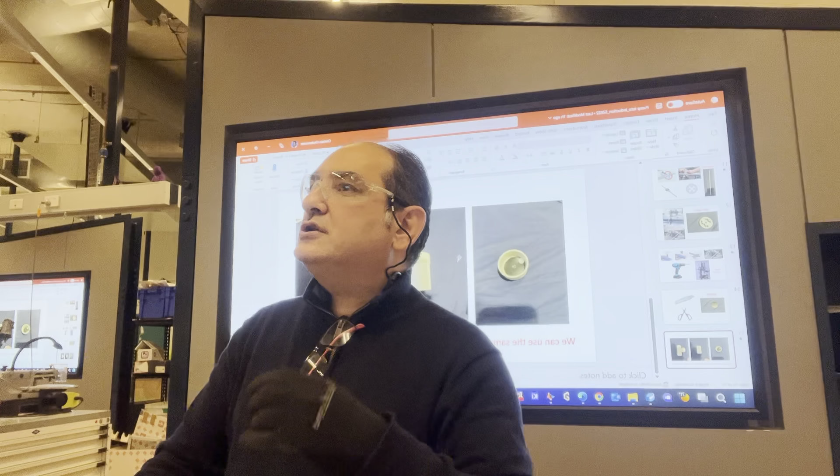Maybe this is not going to affect a lot, and also by the continuous friction, you will have this part actually worn in and the things will be seating. It's something like you have a new engine. That's why when you buy a new car, they tell you, drive the first 5,000 kilometers with a speed less than 70 kilometers per hour, because the engine is actually taking the shape, so you don't have to go for a very high RPM.

Oh, that's the old school. I don't know. You keep doing that, or you're using the car for 2 years and then dump it.

So yeah, that's what we're doing, and that's what we're going to learn on how to do the parts. So we should start first with the activity of cutting the parts.

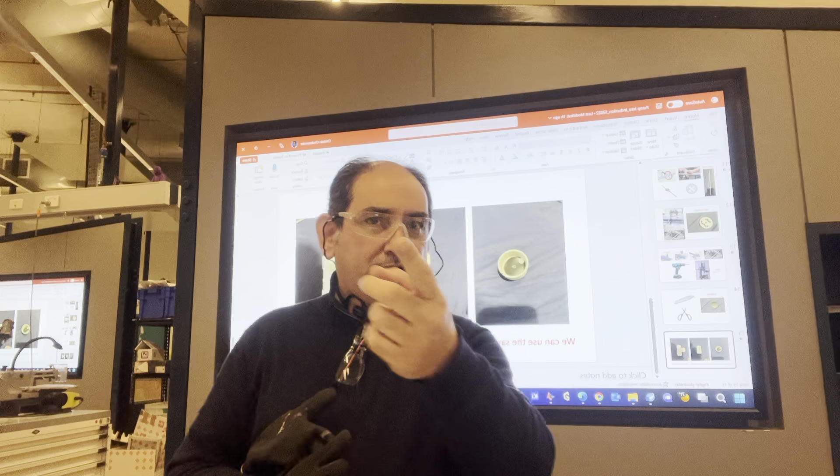About team formation? About what? Team formation. How many teams? Oh yeah, they can work together now just to get the skills, and within the time they will know each other further and start to form the teams. So yeah. Now, do you know each other? That's the problem we have. They don't know each other too much, but they will introduce themselves to each other and start to form the teams of 3, which are going to work together to assemble the pump and test it.